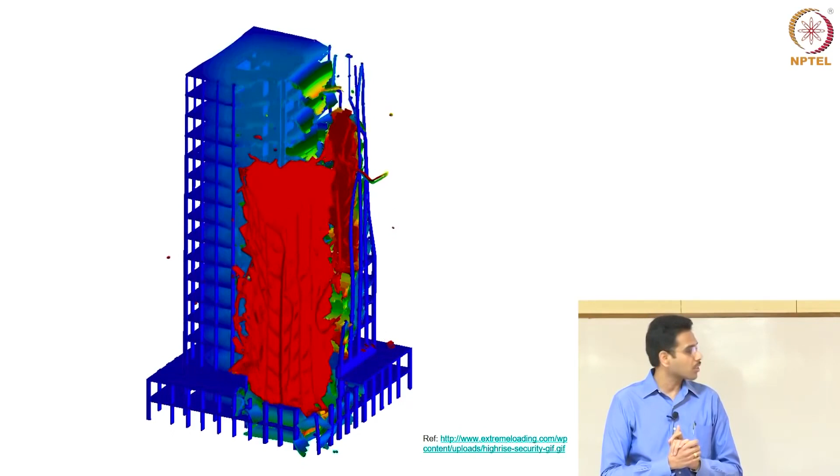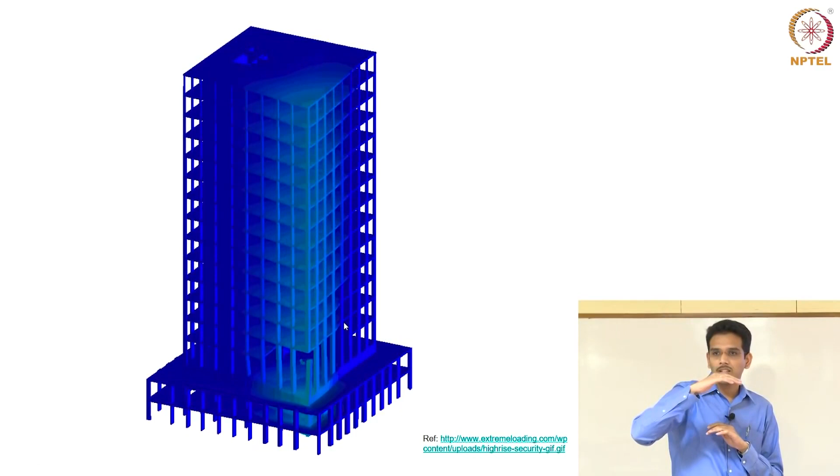So here I have an animation or simulation of a computational model. You can see that it's a model for blast loading in a building. If you notice, at the bottom there is a blast at a column at one of the corners. This column starts failing, and that leads to a progressive collapse upwards. Each slab and each of the structural elements keep collapsing, and then there is a collapse of the entire section of the building.

So these kinds of things can be studied well in advance, even before such things happen. You can try to predict how a building might fail if there is a blast load, and then maybe try to strengthen the building for different cases and come up with innovative designs.

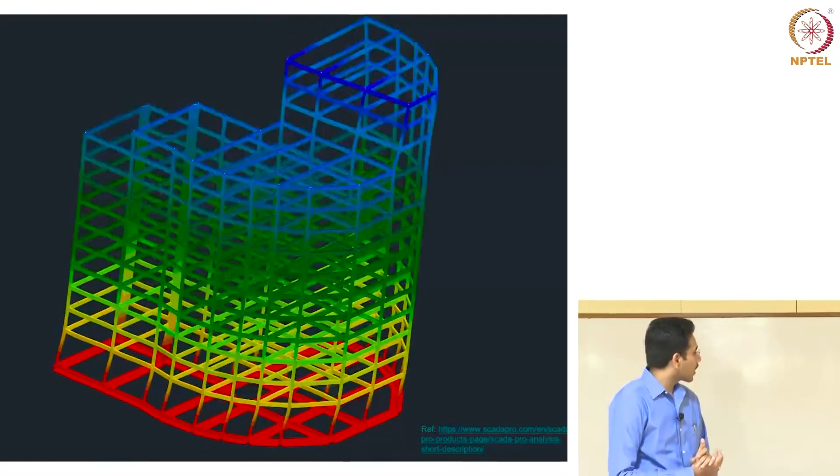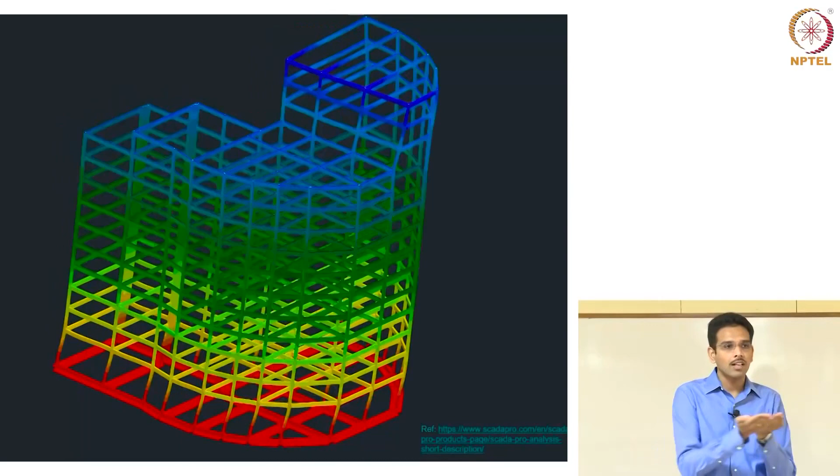And this is another simulation of a building subjected to earthquake loads. So what is an earthquake load? An earthquake is where the ground shakes. So in this case we are looking at ground shaking happening in a lateral horizontal direction. And then you have a simulation of a structure which is on the ground.

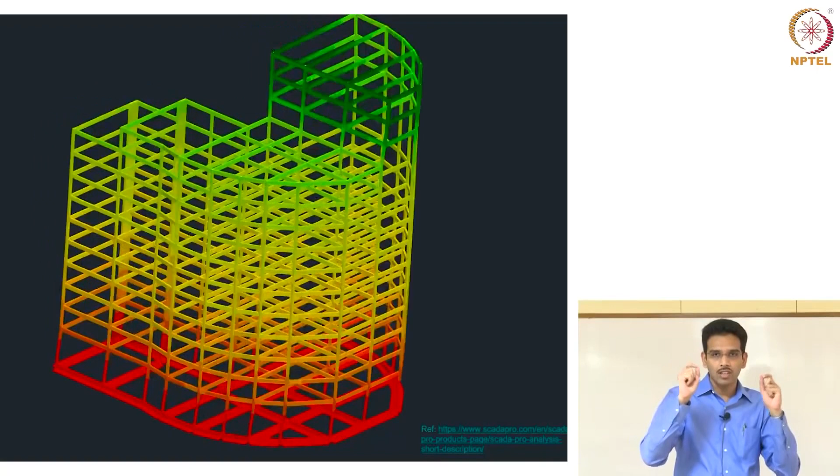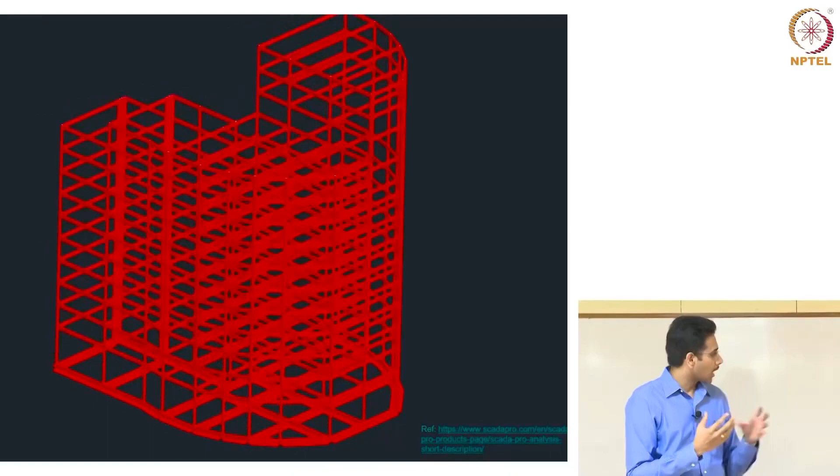So you can study how the forces or deflections of the members of the structure are varying as the ground is shaking. And this will give you a sense of the maximum stresses or forces that my structure can take. Is it good enough? Will it be safe? And if it is not, can I maybe resize my structures? For example, can I make my beams and members larger in size so that they will be stronger, right?

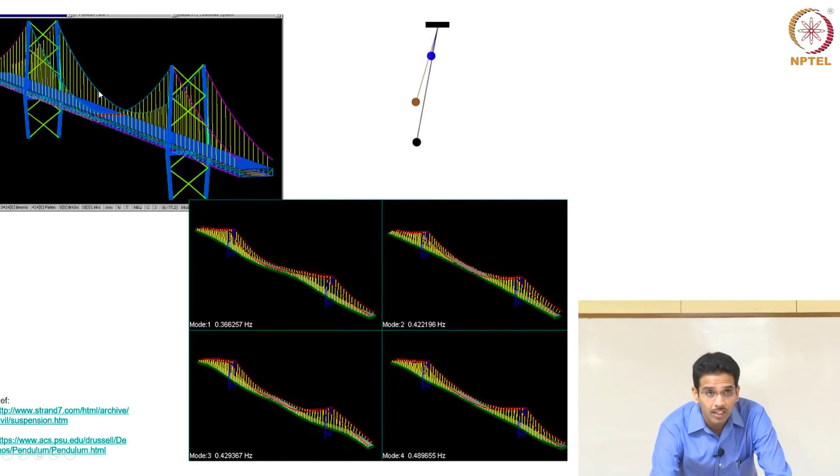And this is another example. We will just look at these three examples and then we will go into the course. So this is another example I thought is interesting. This is a suspension bridge. In a suspension bridge, you have a deck, and it is suspended from cables at the top. Suspension bridges are very important because their dynamic characteristics are very important, because a bridge is subjected to dynamic loads, vehicle loads, wind loads, earthquake loads and so on.

So why are dynamic loads difficult to understand, and why is it important to understand structures in the context of dynamic loads? So think about a simple pendulum. Let's start with the simplest object you know, a simple pendulum oscillating. A pendulum oscillating has a natural frequency or a time period. What is that? It is the time taken for the pendulum to complete one oscillation.

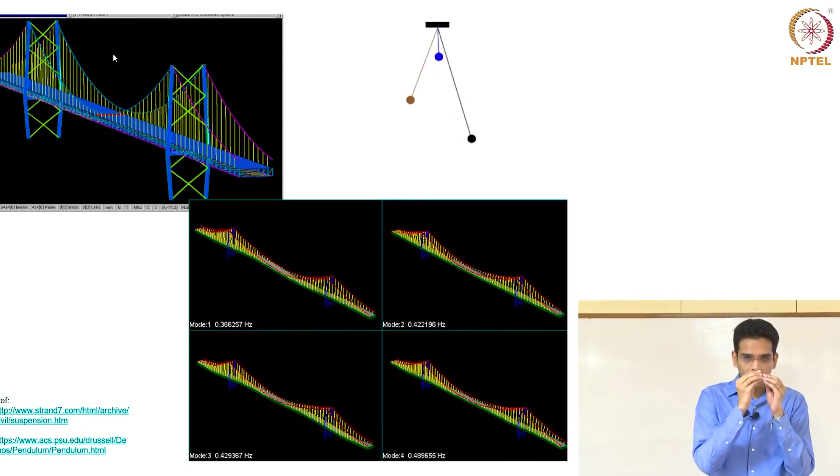And I have shown here three pendulums, one in blue, another in golden and a black one. And what is the difference between them? The length of the pendulum is different. That is, their geometry is different. So if the geometry of a structure, in this case the simple pendulum, is different, it can have a different frequency of oscillation. You can see the blue one is oscillating much faster than the black one. Similarly, depending on the size of the structure, the material used and how the structural members are connected, you can have different modes of oscillation.

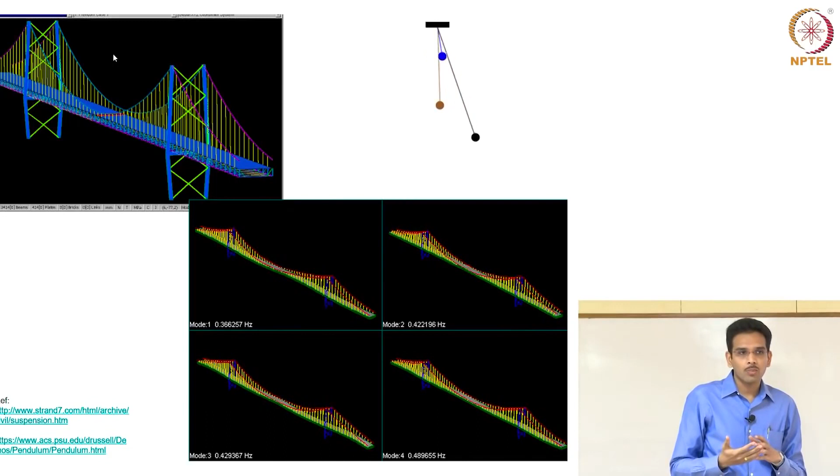In the bottom figure, I showed 4 different modes of oscillation. In a simple pendulum case, you just have one mode of oscillation, so there is just 1 degree of freedom, is what we call it. But in a structure, there are different kinds of oscillations that are possible. For example, you can see the first figure is more like a sinusoidal curve, right? But the second one is more or sort of a lateral torsional oscillation. So different such oscillations are possible, and each oscillation has its own frequency depending on the geometry of the structure.

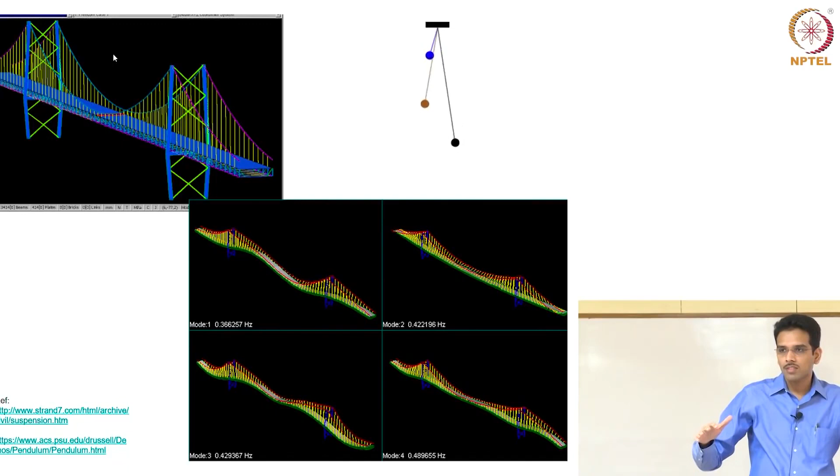So in summary, it's just all about how this geometry and the material property is going to affect your frequencies and how these frequencies are related to the dynamic forces acting on the system. If you can understand that, you can design the structure better for the dynamic loads. So now let's get into what is modeling and simulation.

So what are models? This is quite a general concept as I wrote here. Models are used to understand, explain or predict something. They could be theoretical models, mathematical models, numerical models, computational models, statistical, phenomenological and so on. We will see some of these in the next few slides, what they actually mean and how they are different. And then what is simulation? Simulation is recreating a system or a process or a phenomena.

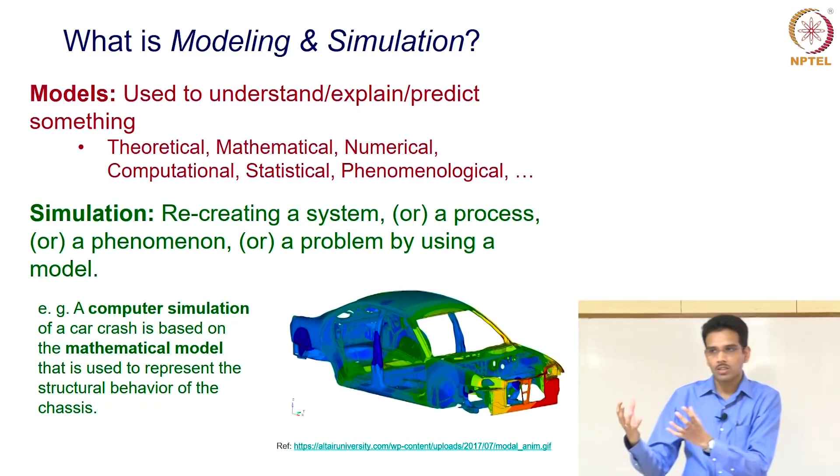For example, here I have an animation, right? So this is about computer simulation of a car crash. So if I want to understand car crash, I don't necessarily have to crash the car thousands of times in different directions. Maybe I run a few thousand simulations and then finally test one or two of the critical ones, right? And when I want to do that, I need to understand a mathematical or a theoretical model for the structural chassis of the car. And then do some computer simulation, solve this problem on a computer and then I can visualize what's happening, right? So these are some examples of modeling and simulation.

So the first one is weather forecast. So let's say you want to predict the path of a hurricane or when the cyclones would come, which states the cyclone would cross and so on. This is very important for irrigation purposes and many other water resources problems, right? So this is typically done based on previous data and also you could maybe use atmospheric physics. So it's a combination of physics and data problem.

Financial engineering is related to stock markets. So you have stock market data based on many years, the trend of the stock market, and then you want to decide whether you want to buy a stock or sell a stock depending on how you predict the stock market is going to behave in the future. And for that you need a model for it. So this is typically done using statistical modeling.

And then there are also other models, for example, atomic molecular interactions have to be modeled if you want to design drugs for some diseases, right? I want to study how the molecules are going to interact, form the bonds or maybe break some bonds to create new drugs maybe for cancer or some other diseases, right? So such research can be done if you model atomic interactions using maybe some experiments as well as some physics based laws.

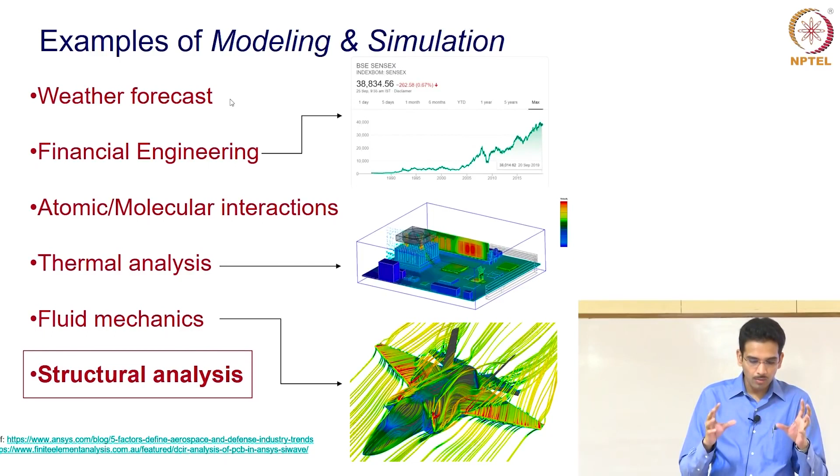If you move it like this versus like this, there is a difference, right? So that's what you are trying to understand. So that is related to fluid mechanics because air is a fluid. And then finally we look at structural analysis, which is the main theme of this lecture, right? We look at the overall context of modeling and simulation in the context of structural analysis.

So before we go into the actual talk, let's motivate ourselves why computers are important. I am sure you know why computers are important for various reasons, but in the context of modeling and simulation, why are they important? Let's start with one of the basic problems. So can you solve Ax equal to b, right? What do you need to solve Ax equal to b, an algebraic equation? You need the input a and b, and then if a is a real number and b is another real number, you should be able to tell me what x is. For example, if 2x equal to 3, x is just 3 by 2, right?

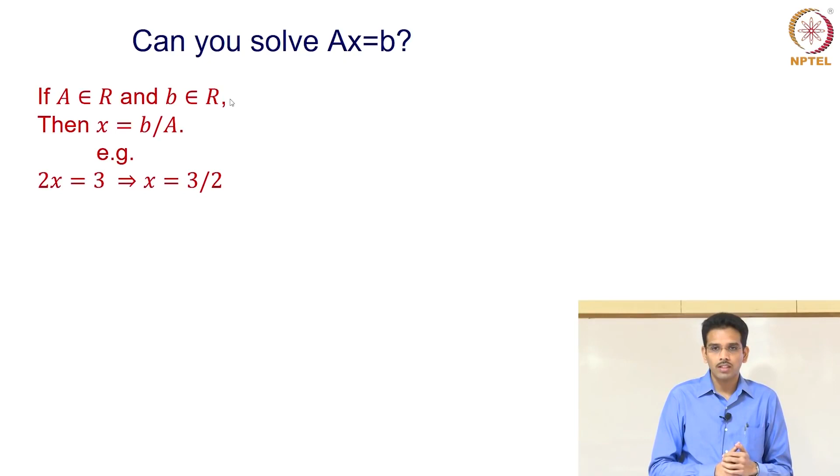Now what if I say a and b are not just single numbers but they are matrices, right? So if A is a 2 by 2 matrix and b is a vector such as the one shown in this example, can you find me a vector of size 2 by 1 from this given input? Which is quite trivial. You just have to invert this matrix, which can be trivially inverted for a 2 by 2 matrix as shown here, and then multiply with the right side vector, you get your unknowns x1 and x2.

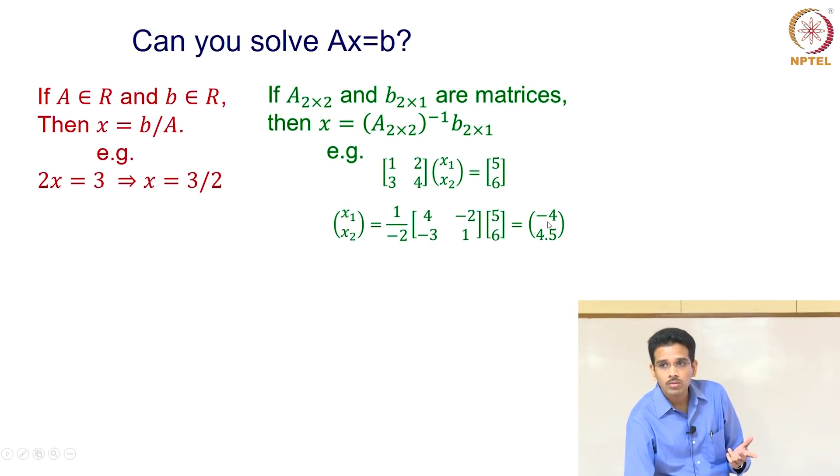But then if I ask you, can you solve this matrix system with an n by n matrix and an n by 1 vector on the right hand side? So basically I am asking you to find x1, x2, up to xn, where n could be maybe 1000. I am asking you to solve 1000 equations at the same time. Can you do that manually? No, right? So why don't we use computers for that?

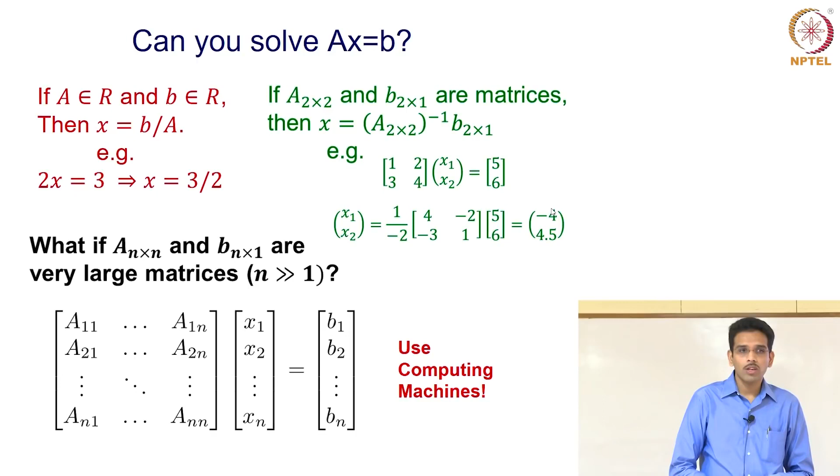So imagine b1, b2, b3, bn, each element in that vector corresponds to a vertically downward force at each point along the length of the beam. So let's say I am applying b1 here, b2 here, b3 here, and so on bn, right? Now correspondingly, if I am pressing a vertical force on the beam, there should be a displacement at those corresponding points. Now I will denote x1, x2, x3, xn as the corresponding displacements at all those forces.

So now if I solve this matrix problem A times x equal to b for a given set of forces on the beam, I can find the corresponding displacements on the beam. So that is a structural analysis problem. Now once I establish the context of this problem, I have this numerical problem which I have to solve. I have a matrix, I have a force set, and I want to find the displacement on the structure.

How do I solve this matrix problem, right? It's a linear algebra problem. You typically have algorithms or solution procedures for standard problems in terms of the properties of the matrix A.

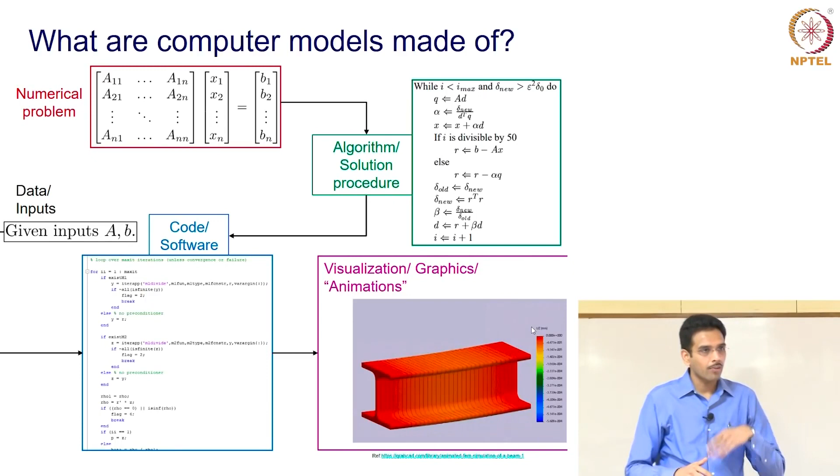Steel rod is also a spring, except that the stiffness of it is much higher than a normal spring you see, right. So again you have a Hooke's law for a steel rod, and why is this useful? Now once I have a model, so let us call this the theoretical or the mathematical model for a spring or a rod derived based on experiment. Once I have this model, next time you give me a force applied on the spring or the rod, I do not have to go back and do my experiment, right. The model is now able to predict the displacement that can occur in the rod. So that is the idea behind developing a theoretical model, and this is very simple and it is kind of obvious if you think about it.

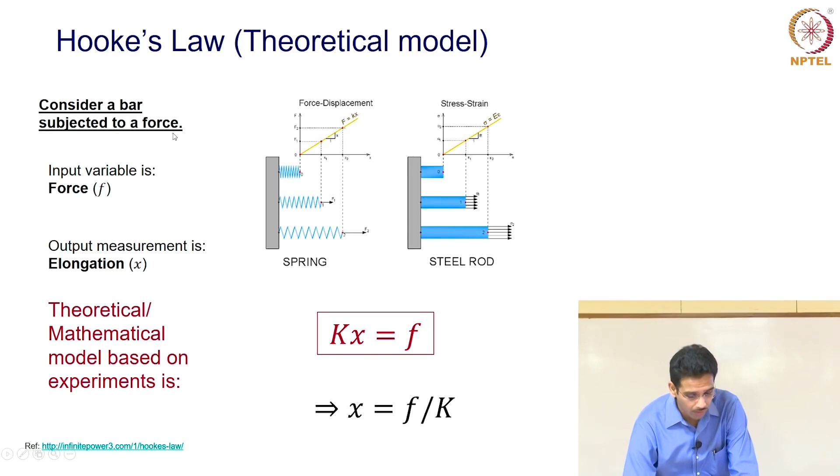That is what I want to do. What do I do based on my previous experience? I have to do an experiment. So if I can do an experiment with forces and displacement and make a plot and maybe potentially find this K full, the stiffness of the structure, then I am good, right?

But how easy is it to perform experiments on structures like this, or maybe more complicated structures, which we will see eventually, right? It's not quite feasible. At this point, we use the math and develop what are called numerical models. Since I know how to deal with a single rod, I can approximate this entire structure as a combination or a network of many bars which are subjected to forces. So each bar here is connected to every other bar, and it kind of approximates this real structure.

So when you are approximating, you know you are dealing with a model. Now this is a numerical model, right? And since I know for each bar, I can write K1 x1 equal to F1, because each bar still obeys the theoretical Hooke's law which we saw in the previous slide. And for the entire structure, all I have to do is combine all the equations from the bars and develop this huge matrix, right? So this huge matrix times displacements at each of the rods and the forces on each of the rods is what dictates the structural behavior of my complicated structure. So this is what represents a numerical model for this problem.

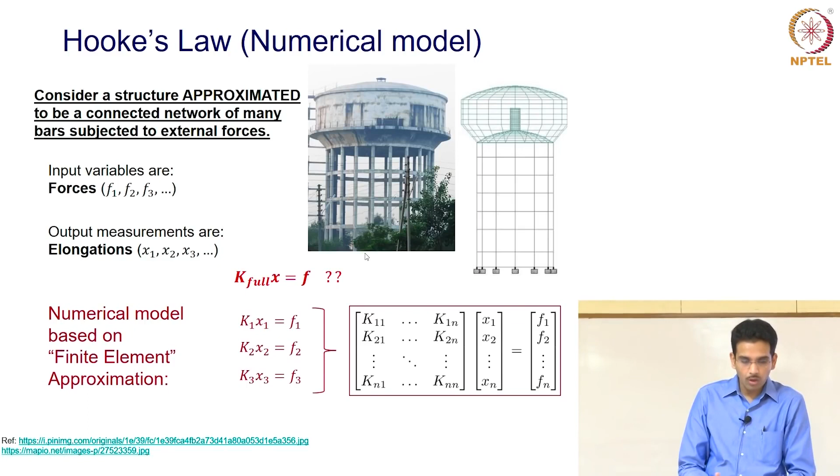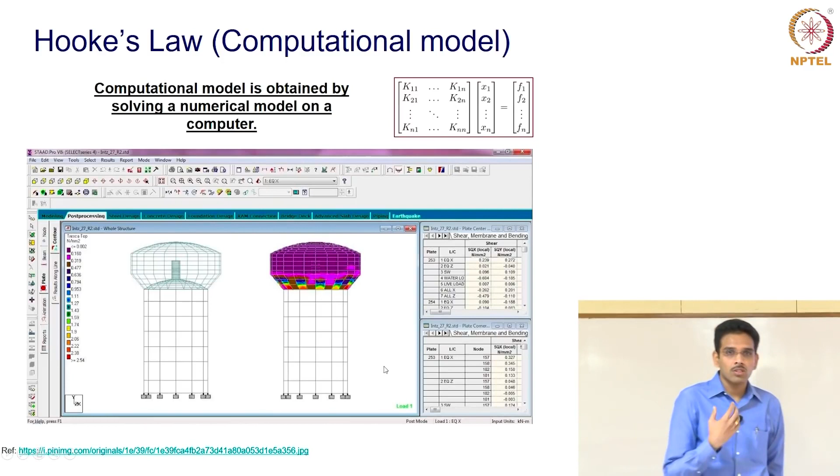And once you solve this numerical problem on a computer, because it is so huge and you cannot solve it manually, that becomes a computational model. So you take a real structure, you convert it into a numerical model, and then you solve the problem. Maybe you press some buttons here, but what is actually happening once you press the buttons is that the code is running and is trying to solve the matrix problem, and is giving you the displacements or forces or whatever you asked it for. And then you can visualize the results and make sense of whether your structure is safe, are you okay with it, do you want to change it, and so on, right?

So let's put it in the overall context of what you might have seen in the previous 2 classes on structural engineering. Maybe you heard about analysis and design and so on, right? So what is happening? When somebody wants to build a structure or a bridge or something, they start with an idea. Yes, I want to build a bridge here, or I want to build a building in this location, and this location is characterized by such and such atmospheric forces or temperature and so on. And this is a material requirement, these are available in this location, these are not, and so on, right? Based on all that, you start with an initial design or a preliminary design for your structure, right?

And once you have your design, based on what we just saw, you cannot do a full scale experiment for it. In some very rare cases that is possible, but in general, it's not possible. So you construct a computational model for the initial design, and this computational model is informed from theory, experiment, as well as mathematics, right? So once you have your computational model, you run it through a computer and perform the analysis and see whether the structure is safe and acceptable. Is that design you came up with initially safe and acceptable? Can it take all the forces without failing? Will the structure stand or will it fall? If it is safe and acceptable, you end your design and you are good to go with your initial design.

If not, you go back, maybe change the layout of your members, or you change the sizes of the members to make it stronger or less strong or whatever you want, and then go back and update your computational model again, because now you changed your structure, and then perform the analysis. And this loop keeps going on until you are satisfied with it. These are what are called design iterations. Typically, if you are performing any structural analysis or building a new structure, many hundreds of such designs are possible, depending on the complexity of the structure.

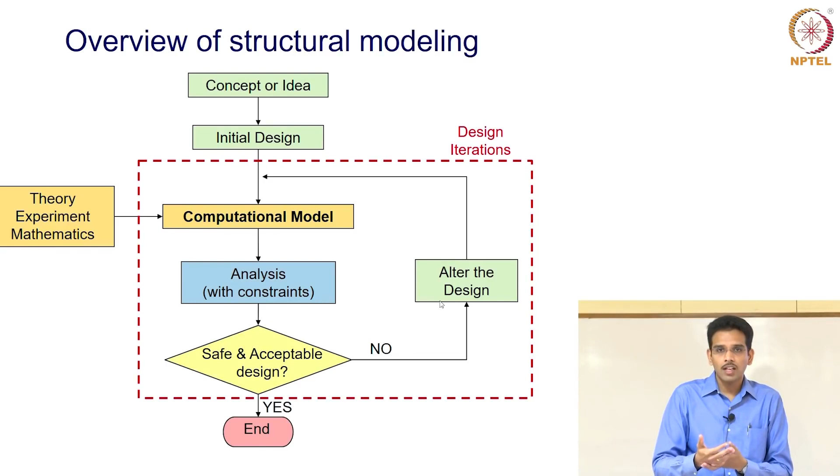So now let's look at some applications on how this structural modeling has helped in designing some of the most complicated and wonderful structures on this planet, right? So this, I'm sure you might have seen in other lectures in this course. Burj Khalifa is the tallest building on the planet, right? And there are some interesting aspects to it from the context of structural modeling and simulation.

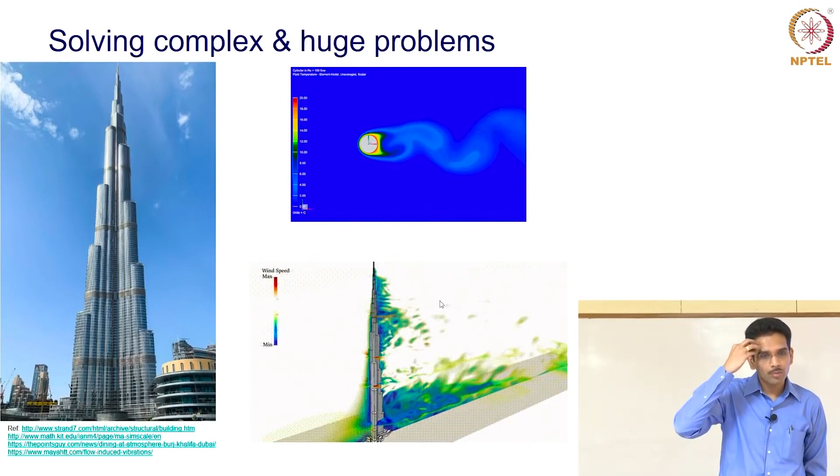So firstly, when I say you have a very tall building, extremely tall building, what is it that comes to your mind? Imagine you are on the top floor of the building: high wind loads, right? There's going to be very high wind loads. So how is this building different from any of the other buildings? Because you are at such a high level, maybe you have a stream of jet winds coming onto your building, and that might affect some structural dynamic behavior which we have discussed in the beginning, right?

So what typically happens is, if you look at this blue part of the animation, I am showing you a cylindrical structure which is put in a fluid motion. So the fluid, let it be wind or water, is moving on the cylinder, and once the velocity of the fluid crosses a particular point, you will see what is called vortex shedding, which is happening here. So there are some kind of features in the fluid that keep moving out away from the structure.

And if it is happening at some frequency, that can resonate with the structure and make your structure oscillate. And that can be very bad for your structure. It can even lead to collapse of the structure. So you do not want your structure to be a cylinder standing so tall with wind so bad that you have what are called vortex induced vibrations.

So in order to overcome that, the designers have come up with this interesting design where they have cylinders staggered as you go up. If you see the structure, there is some sense of spiral action going on here. So the cylinder height is here, and here it is higher than that, here it is higher than that, and so on. So this staggered pattern disrupts this kind of periodic shedding that is happening on the structure, and it will prevent vortex induced vibrations.

And if you see the final wind simulation of the building, you can see there is no such periodic shedding happening. It's all dissipated here. And that is how you know this building is not going to fail under such wind induced loads. And all this is possible if you could just simulate it, right?

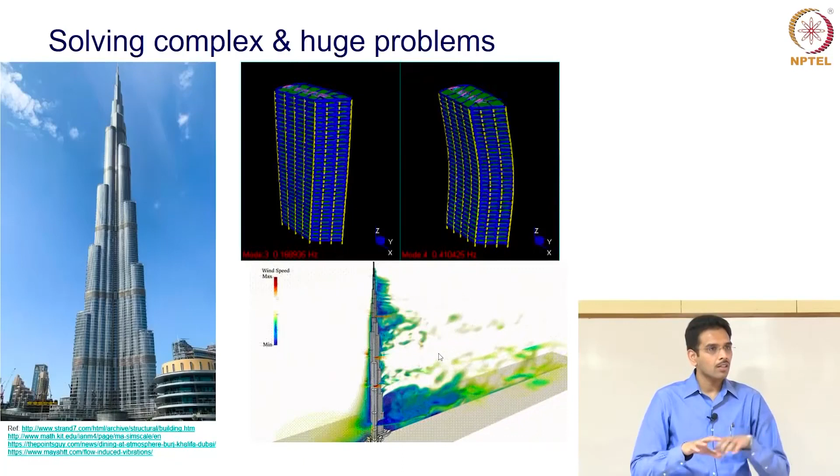And this is another example where you have an earthquake load on the building, so it's oscillating in different modes. So you want to study again which dynamic modes are critical for the building and so on. So now if you see those buildings, and if you count the number of rods we said we will describe the structure with, you can imagine your matrix size could be running into thousands, right? In some of the cases it will be of the size million by million or 100,000 by 100,000.

It will be in the order of millions in many of the structures when you have very small rods approximating such a huge structure. So can your computers actually solve that problem of a million by million matrix times some vector, given forces? A simple standard computer cannot necessarily solve very huge problems. In such cases, you have to deal with what are called supercomputers. So for that, what you need to understand is high performance and parallel computing.

And I thought it is very important that you know about this, at least a little bit of background on this, because in today's world, most of the computers, even the personal computers you are using, use parallel computing. Parallel computing need not necessarily mean you have 10 computers in front of you. All you are doing is you have many cores, and whatever job you are giving out.

So let's say I have to make some calculation. I don't want to make the calculation one after another. I want to do them all parallelly. So let's see how that works. So let's say I am interested in a matrix times a vector. So I want to calculate this matrix times vector. So how do I typically calculate?

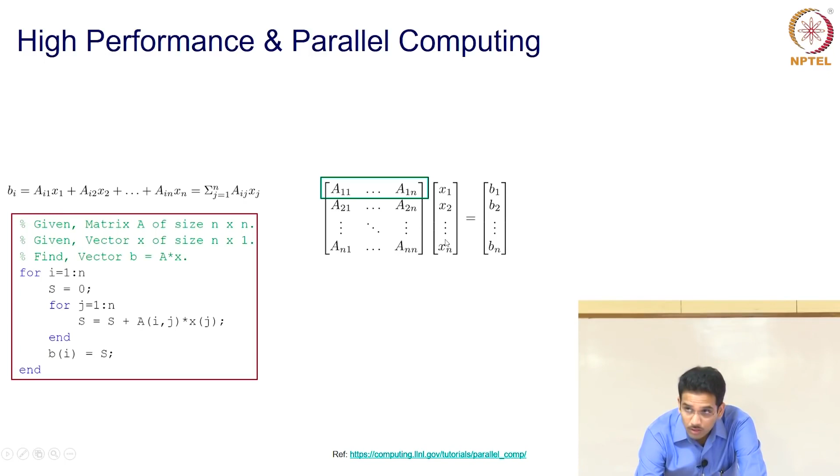I calculate B1 as the product of this row times this vector, right? So A11 x1, A12 x2 and so on, A1n xn. Only after that I can go to B2 and do this row times this and so on. So if I were to write a MATLAB code for this, you have it here.

So for i equal to 1 to n, that is for each Bi, calculate the product of the row elements of the matrix Aij times the corresponding elements of the vector xj. And the way this works is, first it will calculate B1, then it will calculate B2 and so on. So what we suggest to do is, you run the first loop on multiple computers. So I want to calculate B1, B2, B3, Bn all simultaneously.

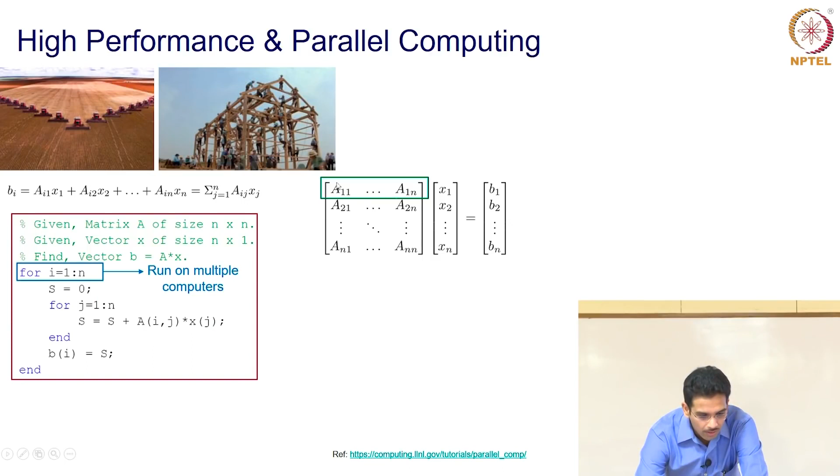And just to get an intuitive understanding of what's happening here, I have a couple of figures taken from the Lawrence Livermore website. So in the first figure, you are looking at plowing a field. You have one tractor, or one machine, to plow a field versus 100 tractors going at the same time. You can finish the whole field in the time taken by one tractor to traverse the field, right? Another case, you are constructing a building, one worker versus 100 workers working on it at the same time.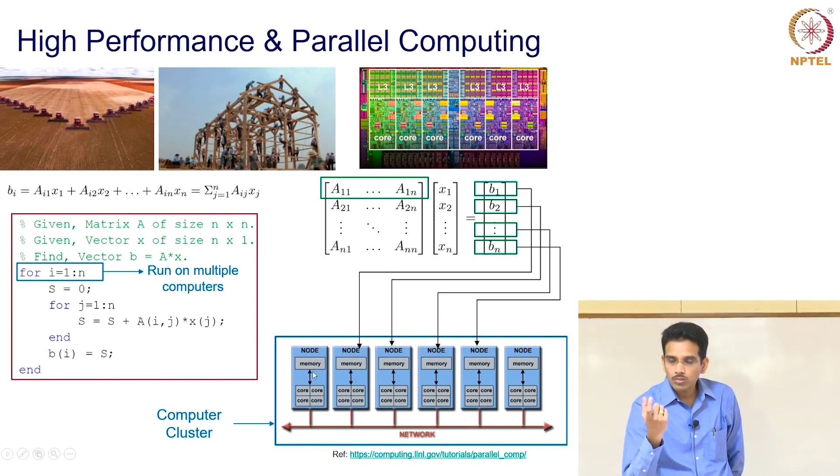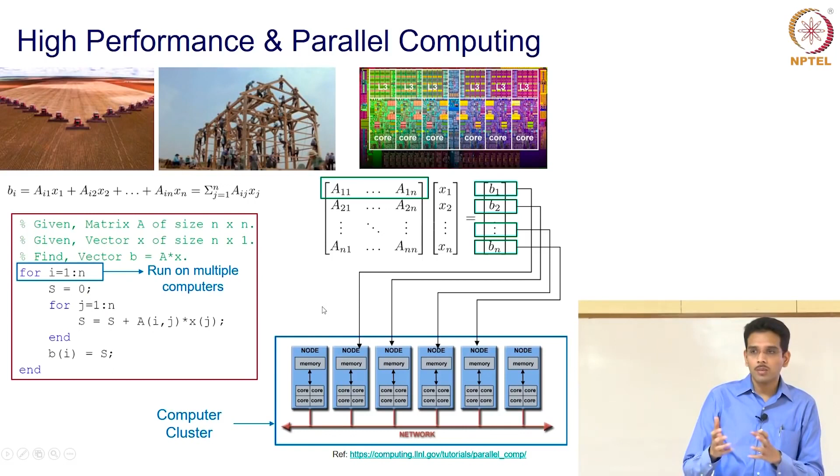So that's the idea. So now what we want to do is, I will calculate my B1 in one computer or one node or one CPU, and B2 in another CPU, B3 in another CPU and so on. But what we need in addition to our standard computers is a network which connects all these computers to tell me that these B1, B2, B3 belong to the same problem. That is called a computer cluster. And many thousands of computers can be connected, and very huge problems can be solved on them parallelly.

And let's look at an exotic example of structural modeling. I thought this is interesting because it would give you a sense of how I can come up with a structural model for a structure which I haven't seen before. For example, I haven't seen this structure before. This is a folded structure made out of a flat sheet of paper, and it turns out it has some very interesting properties. So you see, there is a flat sheet of paper, and I folded some corrugations along it, and you end up with this structure, right? And each part of this cell is shown here in detail, just for you to get an understanding of how it looks.

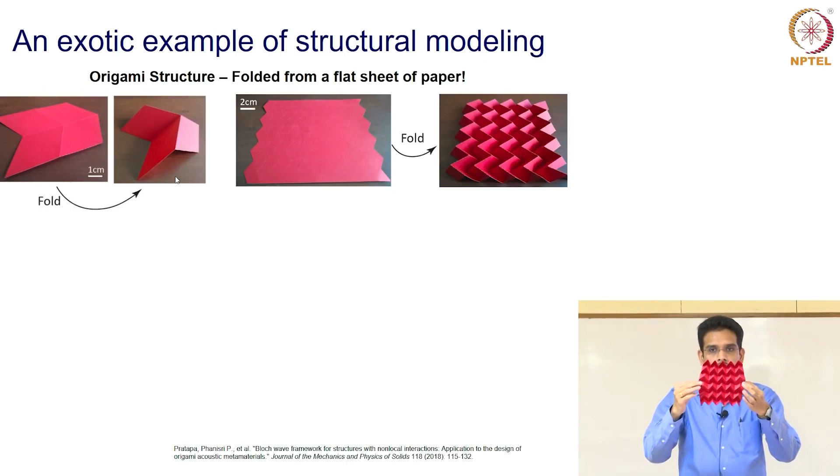And let's say I want to model it structurally. Before I go into the structural model, I have a paper model here, you can come and see it after the class. So it has an interesting behavior. If I pull it out, it extends in both the directions. Why is this interesting? If you take a rubber sheet and pull it out, it contracts in the other direction. But in this case, if I pull it out in one direction, it's extending in the other direction, right?

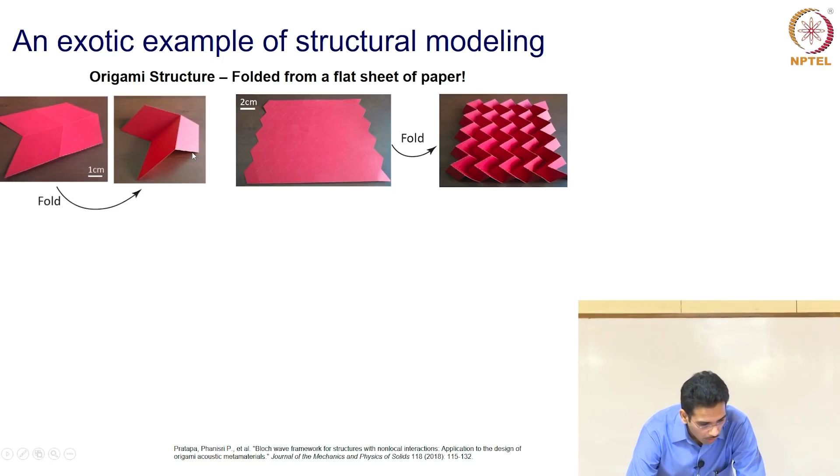So this is called a Miura origami sheet. Origami is the art of folding paper. So now let's say I want to do a structural model for this. I take my unit cell, I understand its geometry in terms of something shown here, but now I want to model it structurally. What do I do? I go back to my idea of replacing the structure with bars, right? And bars are nothing but springs. So I have a quadrilateral panel here.

Firstly, I replace my quadrilateral panel with a set of 4 bars. Then I understand that the opposite corners of the quadrilateral panel cannot be independent. They cannot just go out as they want because it's just a plate, right? So they have to be quite rigid. That means I have to put another bar connecting the diagonal. That is a more realistic representation of this panel, right?

So that's how I come up with a model and I put some springs on it to give a structural behavior, and after I do that, I model it on the computer, right? I simulate it on the computer, and you can see it can give the same behavior as I have shown you. As you pull it out in one direction, the other direction expands, and if you contract in one direction, the other direction contracts, right?

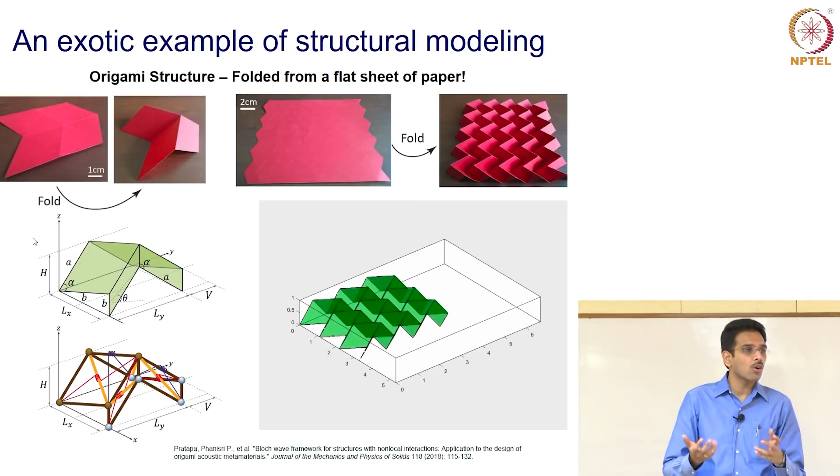So this is how structural modeling can help you understand structures which you didn't know how they would behave, for example. And there are also other systems such as atomic systems, such as one shown here. So this is a combination of graphene and carbon nanotubes. These days you might be hearing a lot of these buzzwords, carbon nanotubes, graphene and so on. They have interesting properties, electronic properties and so on, right?

But even structural engineering has a role to play over there. Why is that? In the end, nobody wants things to fail structurally. If I am making an electronic circuit or a PCB or whatever, I don't want it to break. I want it to be strong enough for whatever stresses it is undergoing. Even the smallest things are subjected to forces. I don't want them to break, right?

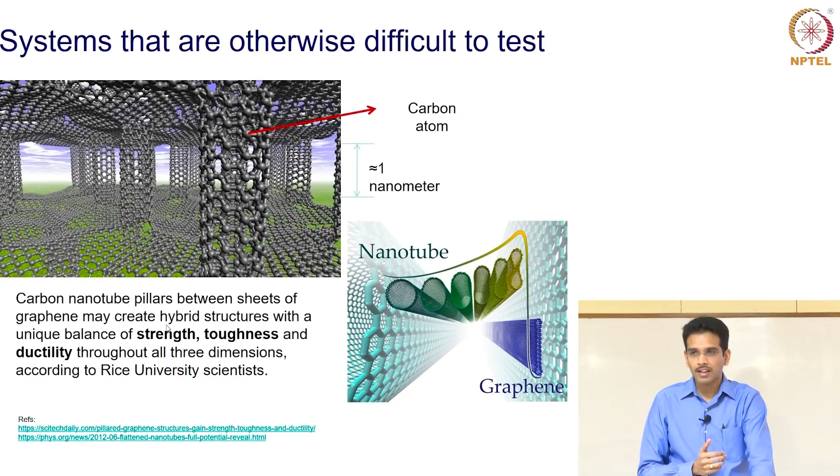So in this case, researchers have found that if you combine carbon nanotubes, which are shown as pillars here, so these are carbon atoms, and then if you combine the graphene sheets, they have a better structural property than both of them working independently. And this has a lot of applications in electronics. And as structural engineers, I see them as columns and slabs and beams, and it's the same concept, right? In fact, the researchers who found this idea were civil engineers from Rice University. So this is another interesting application of modeling.

In the previous flowchart where we discussed design iterations, I said once you are not happy with your design, you go back, change your member sizes and analyze it again. But doesn't it seem a little bit inefficient that I have to tell the structure what to change, what to increase, what to reduce and so on, right? It would be nice if I have some sort of model, maybe an optimization model, which tells the structure, no, now you want to remove the material there or maybe increase the material here to make it more efficient. So that is what is happening here.

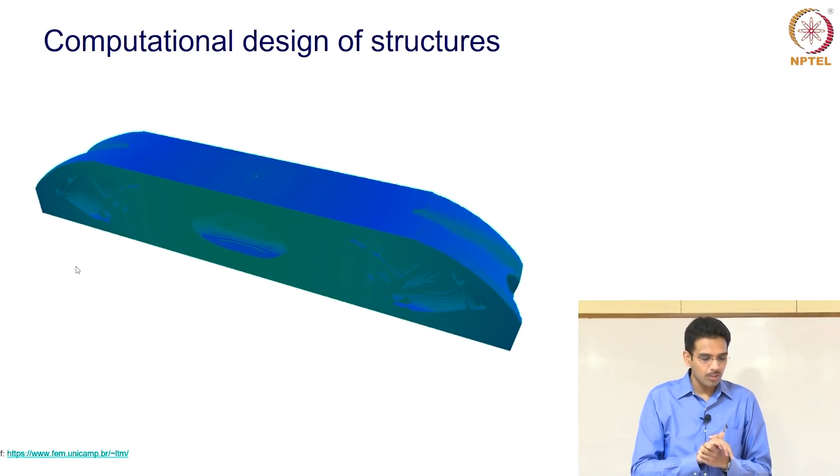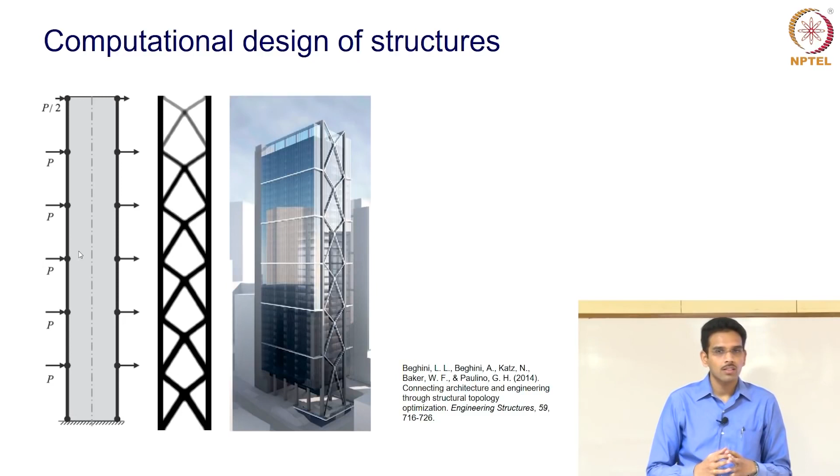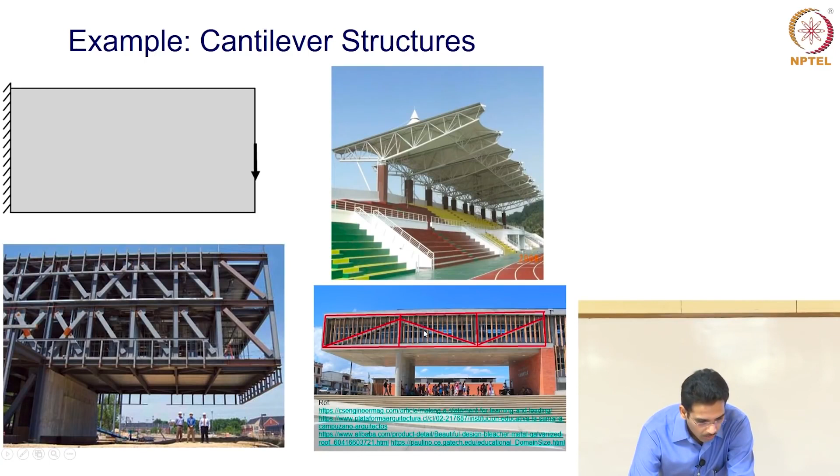And if we have time, we can go over in detail on what kind of cantilever structures you can obtain using this algorithm. I think you might have seen the cantilever structures in your previous lectures. So cantilever is you have support on one end and I apply a load somewhere else, and in between that I want to create a structure which can take this load to the support, right? So that is explained in this figure here, and these are some examples of cantilever structures where you have the support on one end and you have a huge structure in between. So let's see how they compare to what this optimization algorithm would give.

So the optimization has told me that if this length is small enough, I just need a V-type brace, and as you increase it, you need more and more braces to transfer this load to the support, right? But one thing is common between what is existing and what are these. Braces are common, but the way the braces look and the amount of bracing that has to go at one end versus the other end, that is changing, right? So of course, there is hope that you can make structures more efficient.

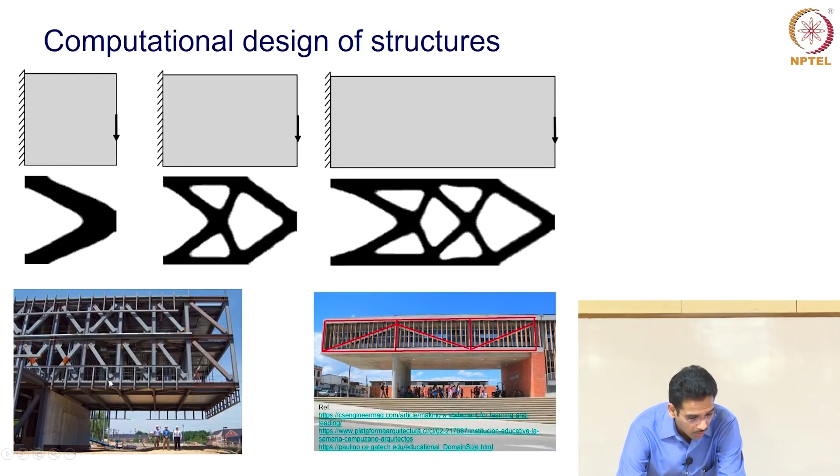Maybe you can use 50% of the material that was used in this to get the same structure and be more efficient, right? So all this sounds good and it looks interesting, but can we actually build it, right? That's probably the question you have in mind.

So here is an example of concrete structure. This column is made out of concrete, and typically you might not have seen concrete in some random forms. But even if you have to build concrete in some weird shell shape and so on, you have to take a lot of effort to make the formwork for the concrete. In this case, they have used 3D printed formwork to make this complex 3D structure.

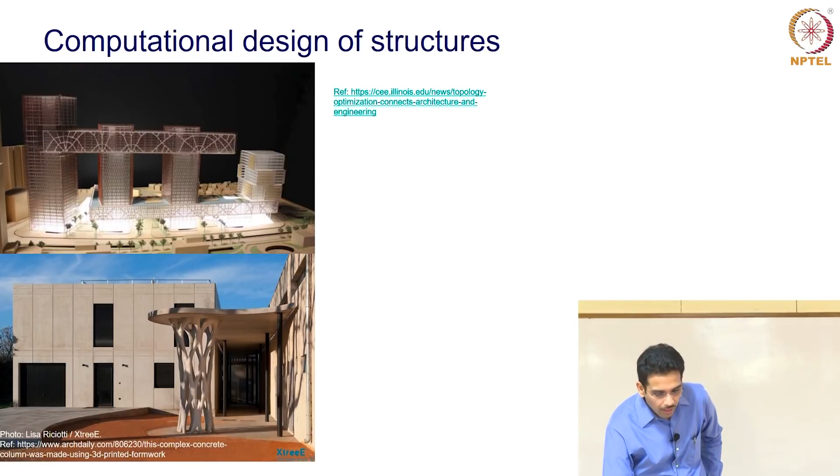So what I would like to highlight here is, it's not impossible to make structures which were not possible before. There are always advances happening in the field to build structures using innovative techniques, and what you thought might not be possible might be a reality tomorrow, right? And another surprising thing is, you even have 3D printed metal lattice structures, and these are right now actually being used in the industry. So industry is actually 3D printing metal lattices to be used in automotives or manufacturing and so on. So that already has become practical.

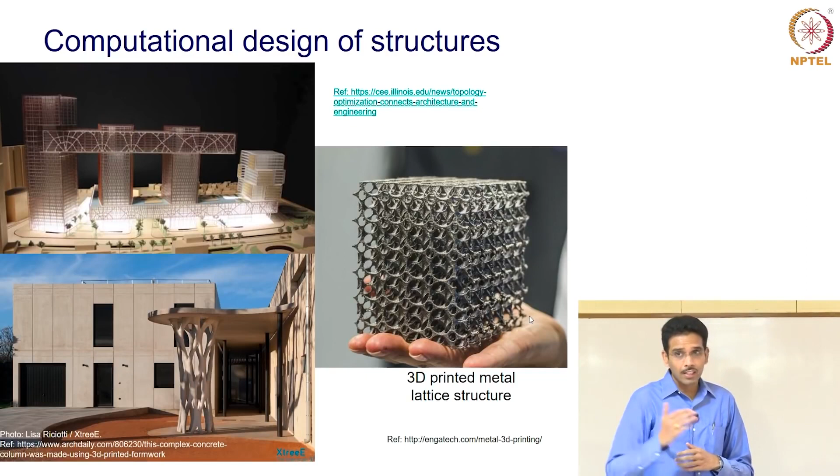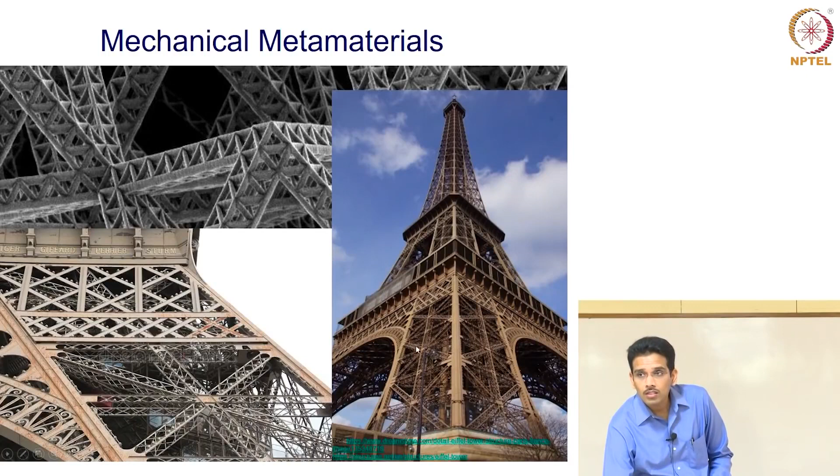Can anybody guess what this is? So does it look something like a part of an Eiffel Tower? Right? Maybe it looks like this truss structure, right? But if you notice this length scale I showed here, it is telling you that the length measurement from here to here is 10 micrometers. What does that mean? The entire width of the slide is about the thickness of your hair strand.

So somebody actually sat down and used some advanced manufacturing techniques, maybe such as 3D printing, to build a structure within the thickness of your hair strand. And that structure is inspired by the big scale structures like Eiffel Tower. And why is this important? How does this make sense, or who cares about this, right?

So if you think about it, when I was talking about the optimization algorithm, I was talking about removing the material which is not taking the load and making the structure more efficient. If I am using less material, I am causing less environmental impact in some sense. So that is one of the motivations you want to design your structures in a more efficient way, right? So if you are removing material which is not being used, you are making the structure light in weight and also having the same strength. So you are making your structures lightweight and high strength.

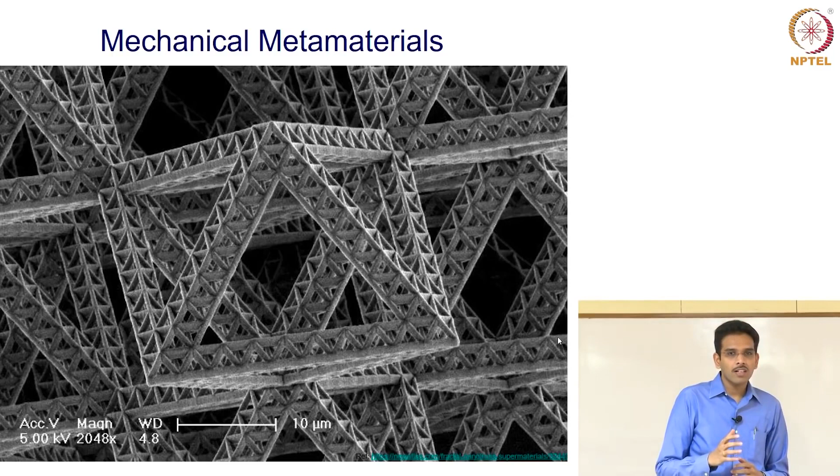So many of the structures you see around, maybe they have too much weight just because we do not have any other way to manufacture them. So you don't want to do that, right? So these are called mechanical metamaterials. They are made in some exotic ways and they have some exotic properties which you might have thought are not possible. So another example on mechanical metamaterials.

Does it physically make sense? Is it just pseudoscience or science fiction or something, or does it make sense physically? It can be explained physically, but the practicality is a different question. So let me try to explain what is actually happening when we talk about invisibility cloaks.

So practically we still do not have it yet, but I take inspiration from this towards what are called elastic or acoustic metamaterials. Instead of light waves, let's say you have sound waves or maybe structural vibrations. I can use the same idea to create some sort of metamaterial around some structure I want to protect and make sure maybe these waves do not touch my structure and just go away, right?

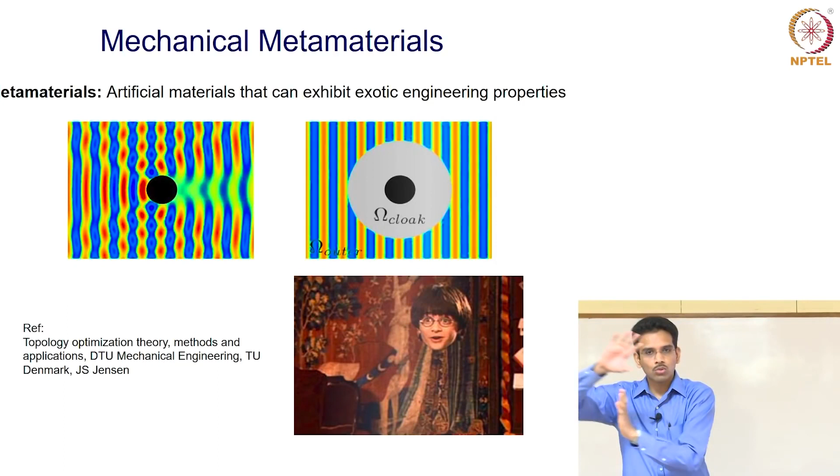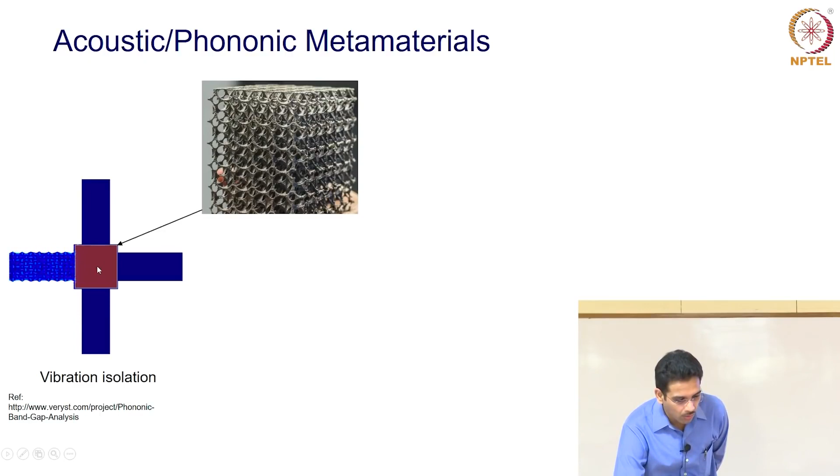So that is explained in this simulation here. So let's say I have some metamaterial shown in some sort of this lattice shown here, and then you have some vibrations on one structure, and I don't want these vibrations to go to the rest of the structure. Now if I can design this geometry of this structure using some optimization in such a way that these vibrations cannot pass through this, that is they will be repelled or absorbed by this lattice, then I can protect this part of the structure. So you can isolate the vibrations.

So another example is wave guiding. So I have this lattice and then you can maybe distort the lattice in some way to make the waves propagate in some particular direction you want, right? So theoretically this is all possible. There are challenges, there are limitations, but the good thing is now theoretically it doesn't seem nonsensical.

So let's say I have a sensitive structure, maybe a nuclear reactor, and I can put such a lattice grid below the ground, and then if I can maybe play around with my lattice and design my geometry of the lattice, you can potentially control the vibrations, maybe earthquake vibrations coming to the structure, go around the nuclear structure and make it safe, right?

So the modeling and simulation, the importance of that context here is you still do not have these systems, you don't have any experiments, but the theory and the models that have been developed fundamentally can be extended to more complex ideas which can result in futuristic structures and materials. That is what I want you to take away from this.

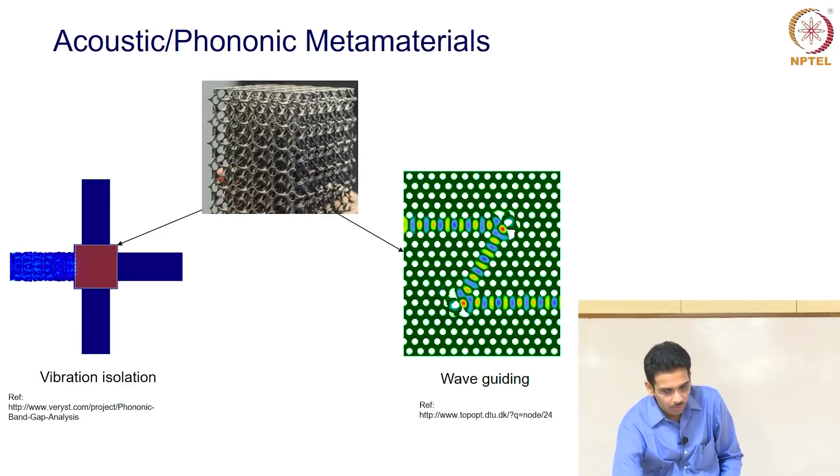And now let's summarize. So I'll just go over briefly the major topics which we have touched upon. So the first thing is models are intended to depict reality. Models are not reality. We want them to depict the reality as best as we can using experiments or other insights. And theoretical and mathematical models are typically derived based on experimental observations in most of the cases, but also there are cases where you can derive from first principles or fundamental laws.

For example, maybe Newton's law of gravitation or maybe quantum mechanics can be used to understand atomic interactions using fundamental laws, not necessarily entirely based on experiments. And computational models are obtained by solving theoretical models on computers, which we have seen, and we have seen the importance of parallel computing in solving large scale structures.

And structural modeling is useful to calculate properties of structures which are very difficult to obtain from experiments, and this is what we have highlighted in this lecture. And we also noted that it reduces the time taken for each design iteration. It makes the designing process of the structures more efficient. And structural computational modeling is useful for analysis as well as design.

And this is a relatively novel concept in the sense that the optimization frameworks that can also design the structures are not very rigorously or widely used in the industry yet. So there is a transitioning phase that is coming in where now you can design and analyze, do everything with modeling. At least that can give you an insight on what the best designs can be, and then of course you can have the human factor in to make it more practical.